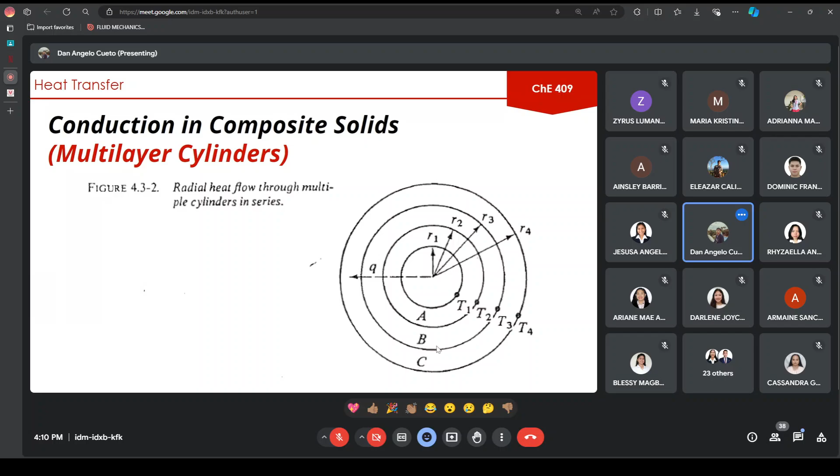Convection is very different from conduction in the sense that in convection, we already consider the motion of the fluid. In conduction, what we consider in heat transfer is steady state heat transfer, where the fluids or substances are not yet in motion, like for example in our walls, slabs, and hollow cylinders. The problems I'll flash on screen will be discussed tomorrow in our face-to-face classes.

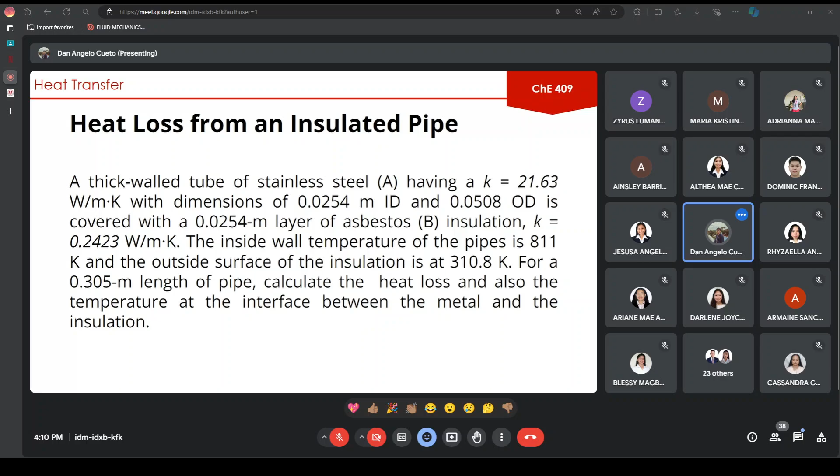Now let me define convection and convective heat transfer. When we say convection or convective heat transfer, the mode of heat transfer here is between a solid surface and the adjacent liquid or gas that is in motion. Take note of the word 'in motion.' So for us to consider it convective heat transfer, the fluid must be in motion. This involves the combined effects of conduction and fluid motion.

In your momentum transfer subject, you already discussed or have background knowledge on fluid motion. The faster the fluid motion, the greater the convection heat transfer. So since the motion or movement of particles is faster, the heat transfer is directly proportional to the fluid motion.

In the absence of fluid motion, the heat transfer between a solid surface and adjacent fluid is by pure conduction only. For example, in tanks, usually the fluid inside is not in motion, so when the fluid is not moving, we consider that as conduction heat transfer. Whereas when it is in motion, it is convective heat transfer, and the calculations involved in quantifying heat transfer are different.

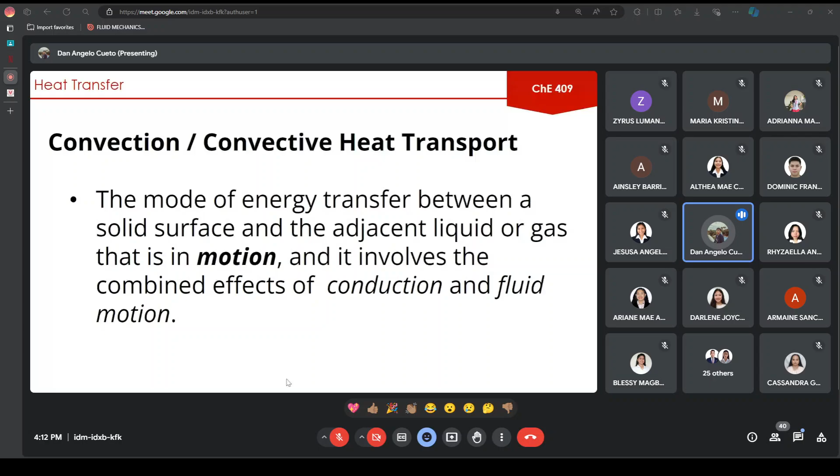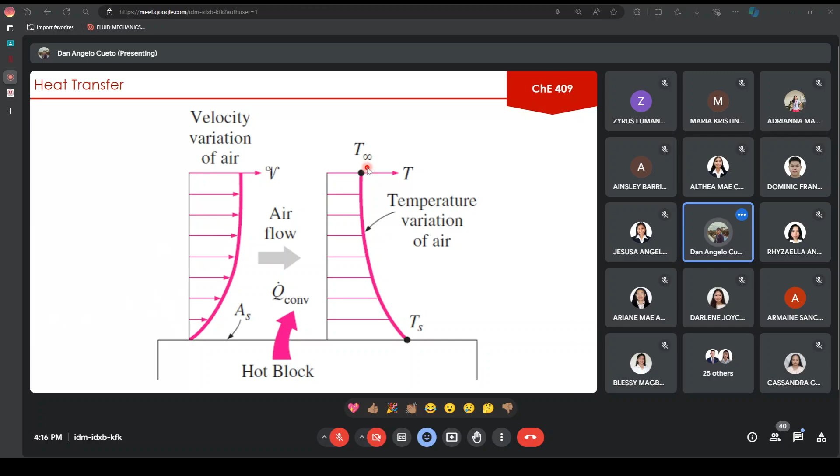Now, for convective heat transfer, we have two types of convection: forced convection and natural convection. So what is the difference between forced and natural convection? Let's give emphasis on the adjective used here, starting with forced convection.

From the word itself, forced, there is an external input to drive our convection. If the fluid is forced to flow over a surface by external means, such as a fan, a pump, or the wind, we call that forced convection. Here, we also account for the velocity of our fluid because the heat transfer from the fluid to the solid substance is being forced.

Whereas in natural convection, it's because of the density differences due to the variation of temperature in the fluid. You know that density differs between a hot object and a cold object, for example, in water: hot water and cold water have different densities based on temperature. So natural convection, from the word natural, is not forced heat transfer; it's based on the density differences of the fluid.

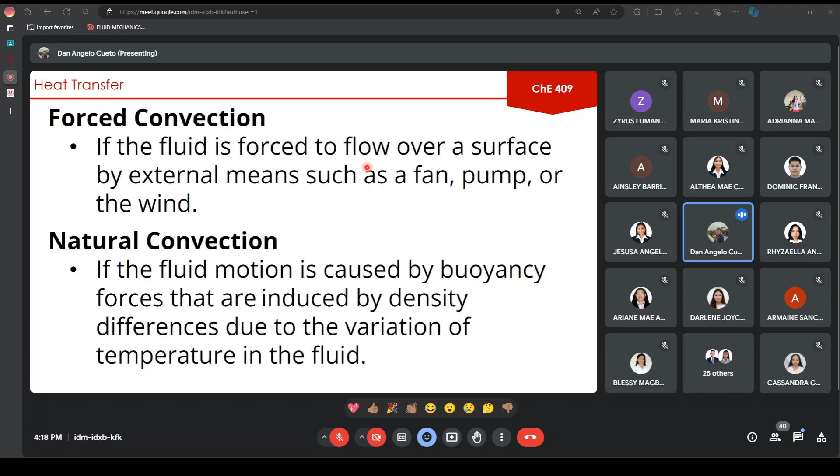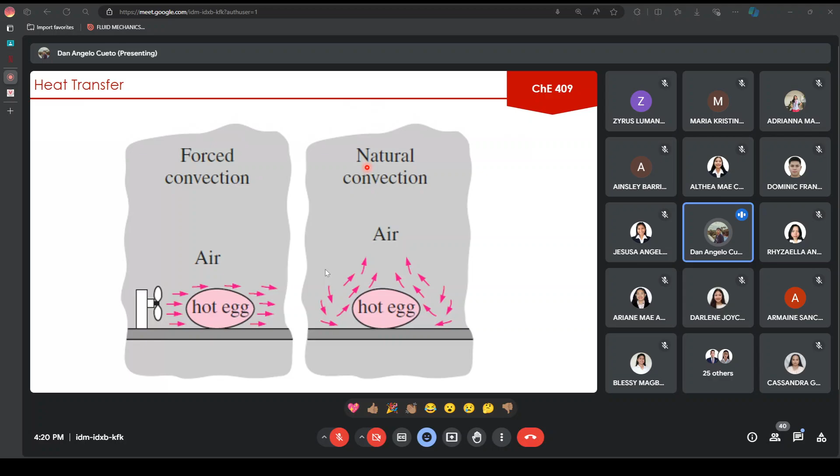Now, despite the complexity of convection, the rate of heat transfer here is observed to be proportional to the temperature difference and is conveniently expressed by Newton's law of cooling, as shown in our next slide. So this formula governs our convective heat transfer.

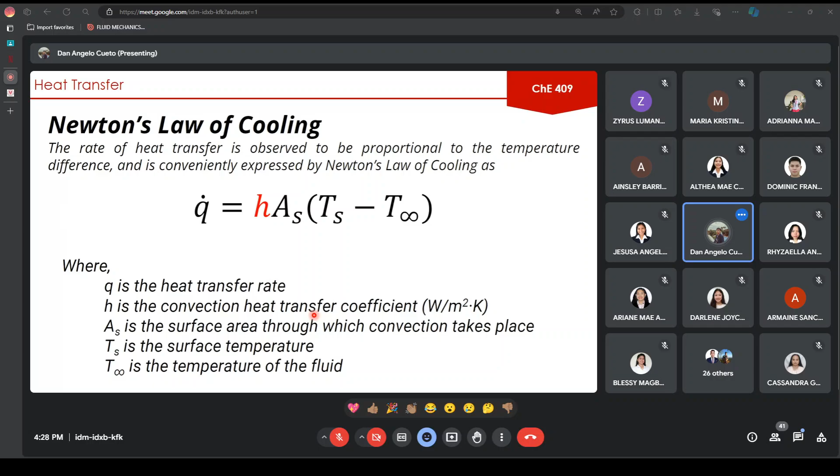So, once again, this formula is for convective heat transfer. And this is also what we'll use to compute for the heat transfer rate. Most likely, H is the property we still have to find or calculate using other formulas which will be discussed later on.

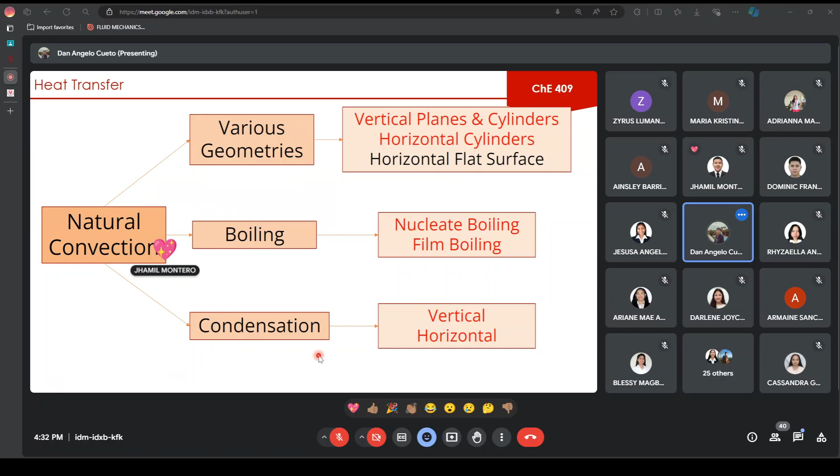So moving on with our discussion, combined conduction and convection. Yesterday, I gave you the formulas for conduction, and we will combine our formulas for conduction and convection to relate to heat transfer.

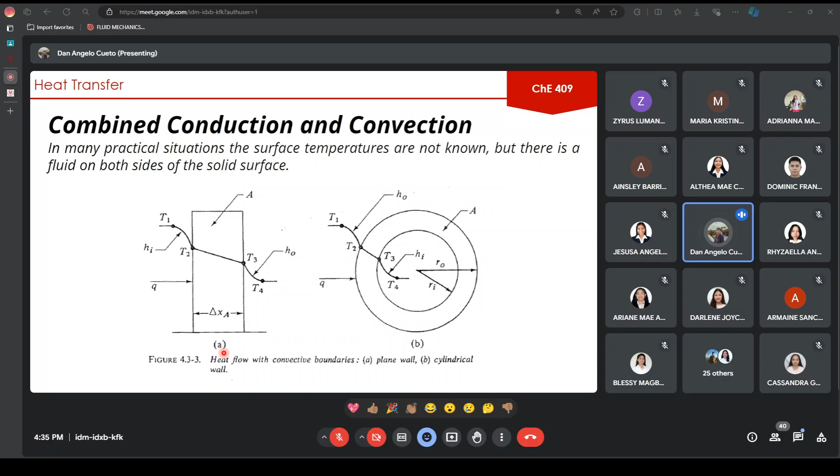So let us see how we can quantify this combined conduction and convection. Pag-usapan muna natin si wall or slab as wall and slab of wall. So the formula here is somewhat similar to our Fourier's law or yung sa ating conduction through a wall. Nga lamang, yung resistances natin na nasa denominator is madadagdagan ng resistances involving the convective heat transfer.

As you can see naman, isang layer lang naman to. So yung resistance natin dito is tatlo. One is for the inside fluid. The next one is itong delta x sub A over K sub A times A is for the resistance na nag-o-occur sa ating material or sa ating wall. At ito namang 1 over H sub O multiplied by the area is the heat resistance or yung resistance na nag-o-occur sa outside fluid natin. Transfer of heat dun sa outside fluid natin.

So narito naman yung ibig sabihin ng bawat symbol, which is already given to you. Alam niyo na yung ibig sabihin ng bawat symbols na ito. Again, more on application po ang ating pag-uusapan dito sa combined conduction and convection.

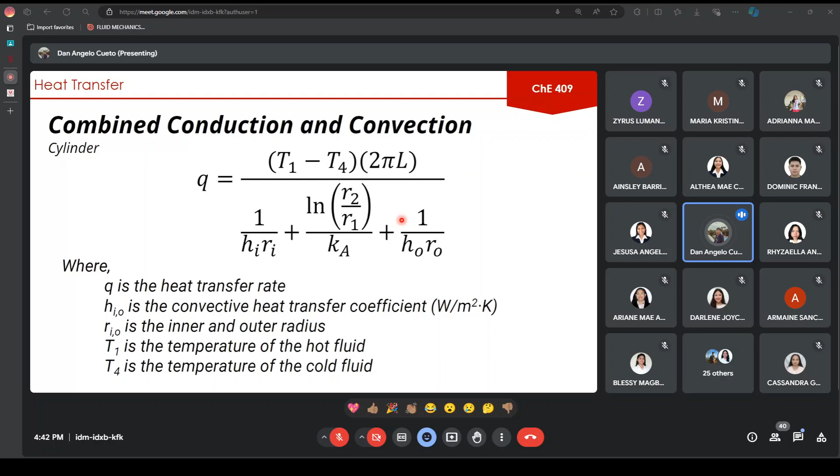Ina-account din natin dito yung mga kadalasan mga insulators, etc. So since hindi naman kadalasan hinahanap, huwag na natin pag-usapan. Yung mga common lamang na scenarios, situations, ang ating pag-usapan dito.

So ito naman yung problem 4, heat loss by the tube. So the combined conduction and convection for cylinders.

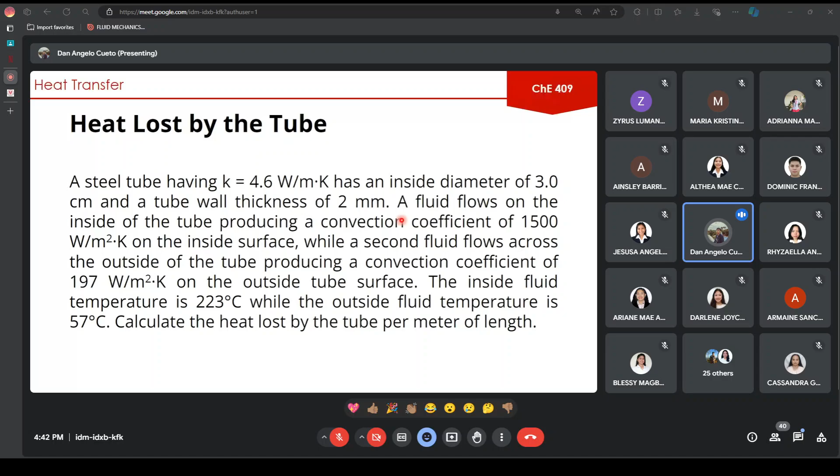Now moving on, another concept that you have to know is the boundary layers na tinatawag. Itong boundary layers, these are the layers na pwede nating ma-identify dun sa fluid in motion natin. Itong boundary layers na ito is more on the concept side of heat transfer. Meron tayo ditong dalawang layer, the velocity boundary layer and the thermal boundary layer na tinatawag. Pagka sinabi natin velocity boundary layer, this is the region of flow above the plate, bounded by a certain distance from the plate, in which the effects of the viscous forces caused by fluid viscosity are felt.

Now yung fluid kasi natin, meron kasi siyang retardation na tinatawag sa mga layers ng fluid natin in motion. Hindi naman siya kadalasang basta na lang flow kumbaga. May shear forces tayo consider dito kapag pinag-uusapan natin ng fluid in motion. So kaya kung papansin niyo dito, yung velocity kasi ng ating fluid at the surface of our solid is 0. Again, because of the shear forces na present sa ating fluid, which is yung viscosity natin. Kasi sabi natin viscosity, that is the resistance to flow. So that hinders the movement ng motion ng fluid dito sa surface ng ating solid.

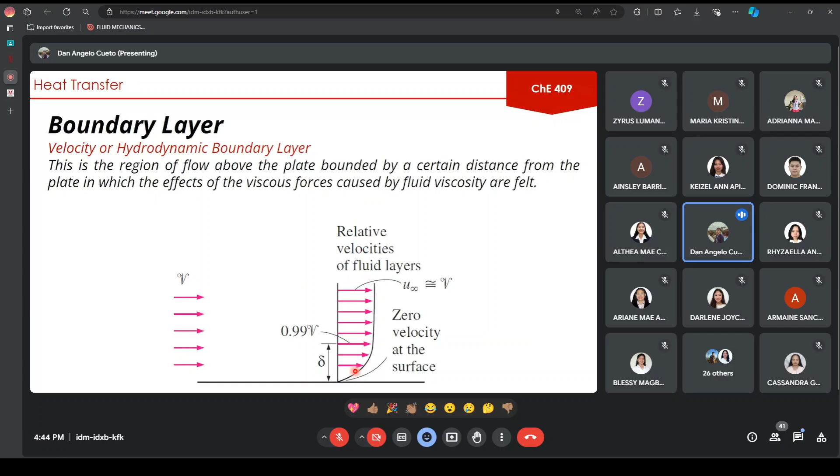Now moving on, meron naman tayo ditong thermal boundary layer. Kasi sinabi naman natin thermal boundary layer, this is the flow region over the surface in which the temperature variation in the direction normal to the surface is significant. Ibig sabihin, itong boundary layer na ito, this is where we consider yung bulk temperature ng fluid natin. Since dun nga sa first layer ng ating fluid in motion, hindi kaagad, rather hindi equal yung temperature ng fluid natin na nasa surface dun sa overall temperature ng fluid natin. So itong si thermal boundary layer na ito yung nagdidictate sa region na kung saan yung temperature variation between the first, second, third layers of our fluid in motion is significant.

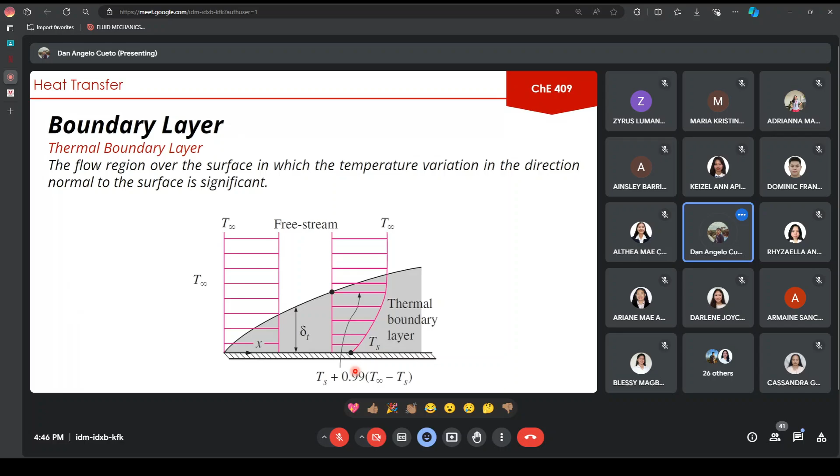So sabi nga natin, ang heat transfer coefficient is naka-based sa properties ng fluid, sa velocity ng fluid natin, sa flow ng fluid natin. So number one dimensionless quantity na ating pag-aaralan is the Prandtl number, which is the ratio of the shear component of diffusivity for momentum to the diffusivity for heat, and physically relates the relative thickness of the hydrodynamic layer and the thermal boundary layer.

Now this Prandtl number is once again a dimensionless quantity, or wala siyang unit. So this Prandtl number consists of the specific heat of the fluid, the viscosity of the fluid, as well as the thermal conductivity of the fluid, since these properties of fluid affects the heat transfer na meron tayo via convection or via convective process. This Prandtl number is also available sa inyong various formula nito, as well as in values, of course, for the specific heat, viscosity, thermal conductivity. Ang main focus natin dito is, of course, we have to know the temperature of our fluid para malaman natin itong iba't ibang properties na meron tayo.

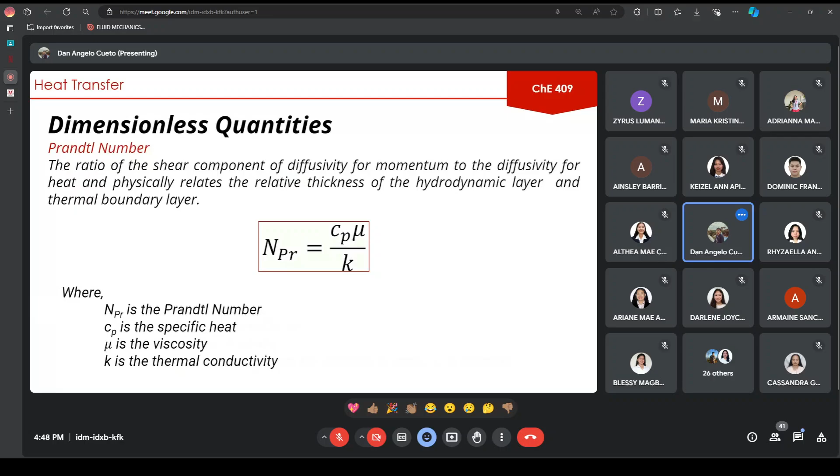Next naman, after the Prandtl number is the Nusselt number na tinatawag. This is used naman to correlate or to relate the data for the heat transfer coefficient H to the thermal conductivity K of the fluid and a characteristic dimension D. Yung characteristic dimension natin dito is naka-based sa geometry ng ating solid. Now, for example, sa pipes natin, D is diameter.

Now, as you can see, meron tayo ditong nandito na yung si heat transfer coefficient. So ginagamit natin si Nusselt number to find the heat transfer coefficient based on our thermal conductivity, which is, sabi ko kasi, yung resistant force na meron tayo sa heat transfer natin. So mahalaga itong si Nusselt number para mahanap natin si heat transfer coefficient.

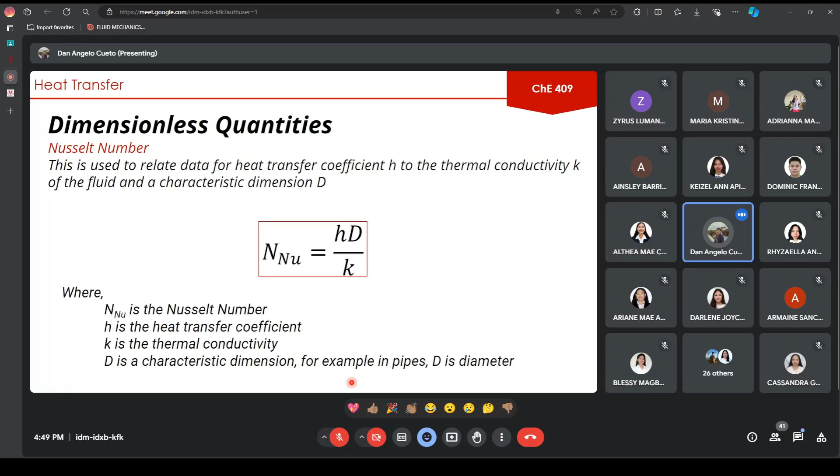Ayan, punta na tayo ngayon dito sa formula na ito. Si Nusselt number natin is also used to relate the Reynolds number, the Prandtl number, as well as the fluid viscosity at the bulk temperature and the fluid viscosity at the wall temperature.

So, diba, yung una ay ang alam nyo lamang ay itong HD over K. Si Nusselt number din is equal to 1.86 etc. Pwede natin i-equate itong HD over K equals 1.86 times the Reynolds number, Prandtl number, D over L raised to 1/3, times the ratio of our fluid viscosities at different temperatures raised to 0.14.

Now this formula, guys, is used to find the heat transfer coefficient for laminar flow inside a pipe. So mahalaga po na makompute muna natin si Reynolds number for us to determine whether our flow ay laminar, transition, or turbulent. So mas ma-appreciate natin itong formula if ma-apply natin siya sa problem to find the heat transfer coefficient.

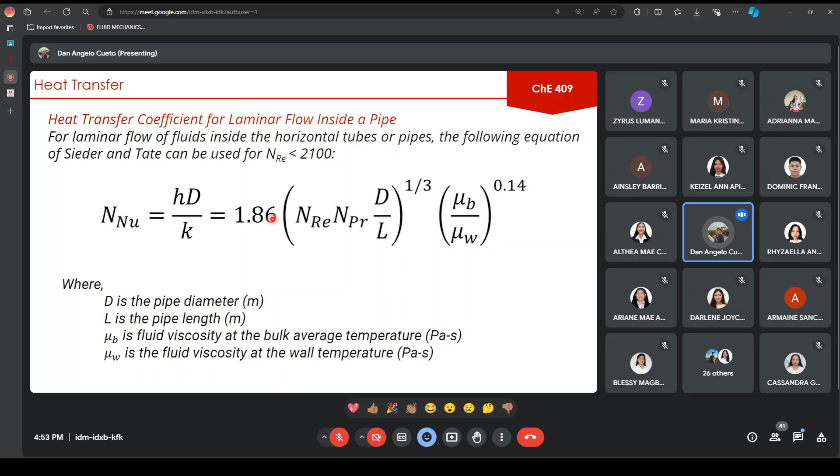For a turbulent flow inside the pipe, ito naman po, yung Reynolds number natin dito is greater than 6,000 and yung Prandtl number natin is between 0.7 and 16,000, having an L over D or a length over diameter ratio of greater than 60.

Now dito, as you can see, naiba po yung itsura ng ating formula. But still, may Reynolds number pa rin tayo na kinoconsider dito. May Prandtl number pa rin tayo kinoconsider dito. Meron din tayo kinoconsider dito na fluid viscosity at the bulk average temperature and the fluid viscosity at the wall temperature. Now these two formulas is para kung available sa inyong Perry's.

So, if I were you, you can highlight these two equations para hindi na kayo malito, or rather, alam niyo na agad kung saan hanapin. So one thing again that I would like to suggest to you is you actually read your Perry's. Ang Perry's, hindi lang siya kuhanan lang ng values. Yung Perry's natin, kasi meron din kayo kapupulutan ng mga concepts if you have the right reading comprehension for that. So I just really try to read your Perry's kasi marami kayo makukuhang concepts din doon.